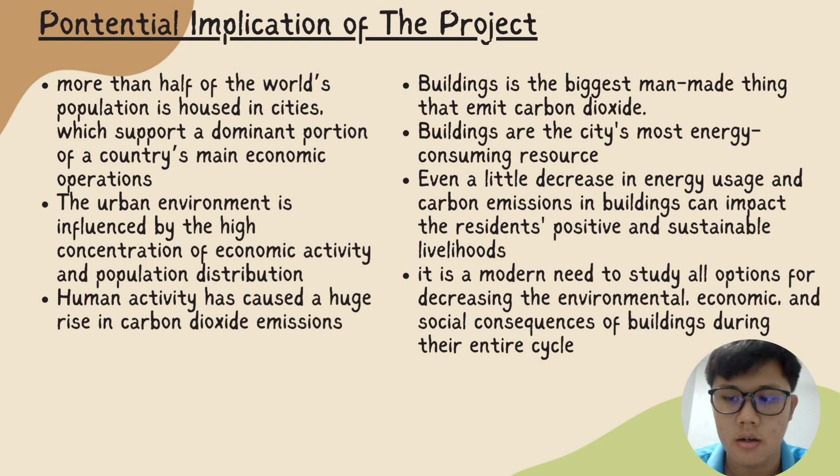So to solve the issue that I mentioned before, the high rising carbon dioxide emission, one such idea is green building, also known as energy saving building, ecological building, or sustainable building. Green building has a greater commercial value than standard buildings because of their perceived lower carbon emissions, energy savings, and optimum economic advantage throughout the life cycle.

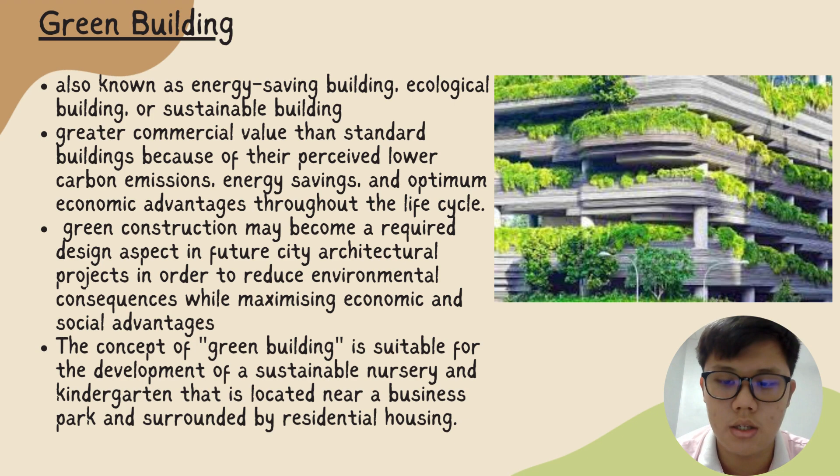Because of this, green construction might become a required design aspect in future city architectural projects in order to reduce environmental consequences while maximizing economic and social advantage. So, the concept of green building is suitable for the development of a sustainable nursery and kindergarten that is located near a business park and surrounded by residential housing.

Next, let me explain the potential implication of sustainable construction towards the environment. First, sustainable construction can save water. There are several ways for sustainable construction to save water, such as water-efficient sanitary items such as toilets, bidets, urinals, sinks, and many more, water waste prevention, and water collection and storage systems.

Besides that, sustainable construction can minimize the use of non-renewable resources and lower the ecosystem impact. Erosion and sediment control, stormwater management, and sustainable landscaping can create a sediment and erosion control plan that can reduce soil loss during the sustainable construction. Furthermore, the use of renewable materials in the construction of the sustainable nursery and kindergarten, such as bamboo, cork, and wheat straw boards, or even certified wood, can help to reduce the use of non-renewable material.

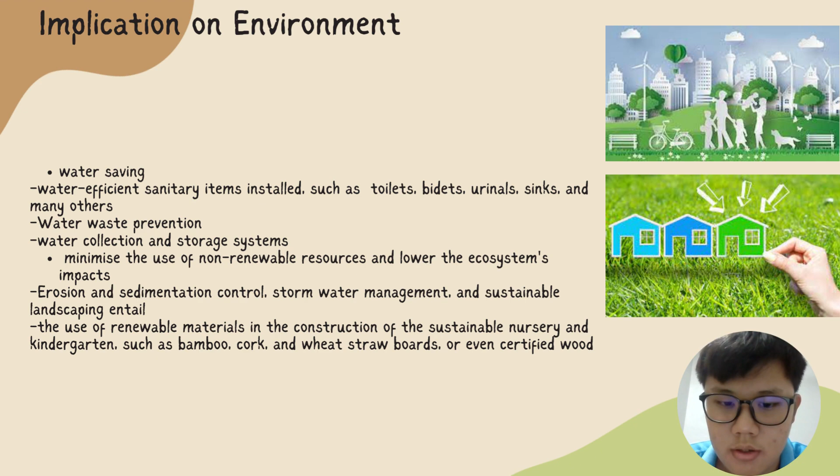Next, the potential implication of sustainable construction towards the environment is that it can lower air pollution and greenhouse gas emissions. Emissions are decreased by energy-efficient design, the use of renewable energy, and the building commissioning of the sustainable construction. Next, it also can save energy. Passive building design, high-efficiency HVAC systems, and even electronic devices with Energy Star labels can help to save energy.

So lastly, sustainable construction can lower the building life cycle emission. The nursery and the kindergarten might be employed to encourage the long-term growth of low-carbon construction.

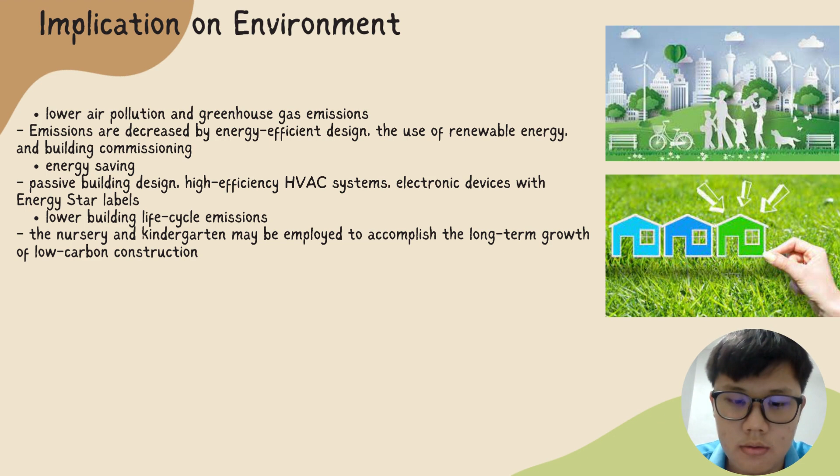So let's move on to the implication towards the economy. First of all, the green building concept that is applied to the nursery and kindergarten can bring secondary financial opportunity to both the building owner and society, in addition to leading to cost reduction. For example, green building elements can improve the health, convenience, well-being, and productivity of building occupants, and this can lower absenteeism and increase productivity to provide owners financial gains.

Second is the initial cost can be offset. This can be done by enhancing the building envelope by removing the perimeter heating, ventilation, and air conditioning HVAC system and minimizing the HVAC system, and this can lead to lower energy usage and lower maintenance and operating expense.

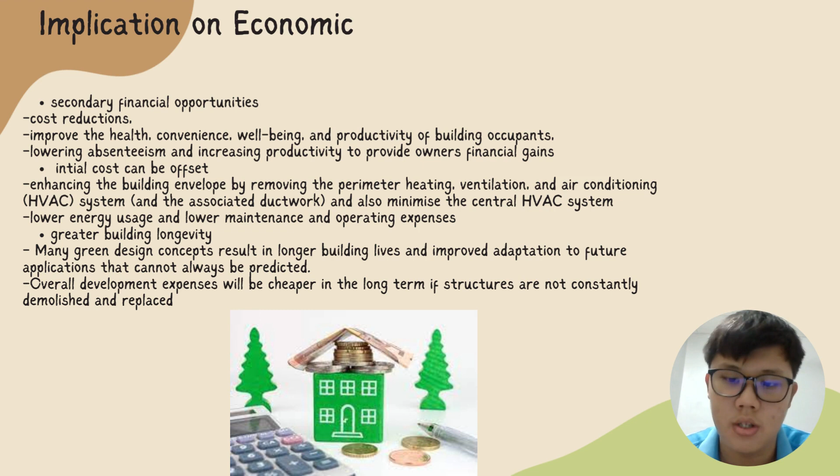Lastly is the greater building longevity. So many green design concepts result in longer building lives and improve the adaptation to future applications that cannot always be predicted. So overall development expense will be cheaper in the long term if structures are not constantly demolished and replaced.

Besides that, sustainable construction of nurseries and kindergartens can improve worker retention and recruitment. According to Willard, firms that make sustainability a core goal might profit by attracting and retaining young individuals such as teachers and nannies who love the environment and are thus more likely to work harder to guarantee that the organization's environmental ideas are met.

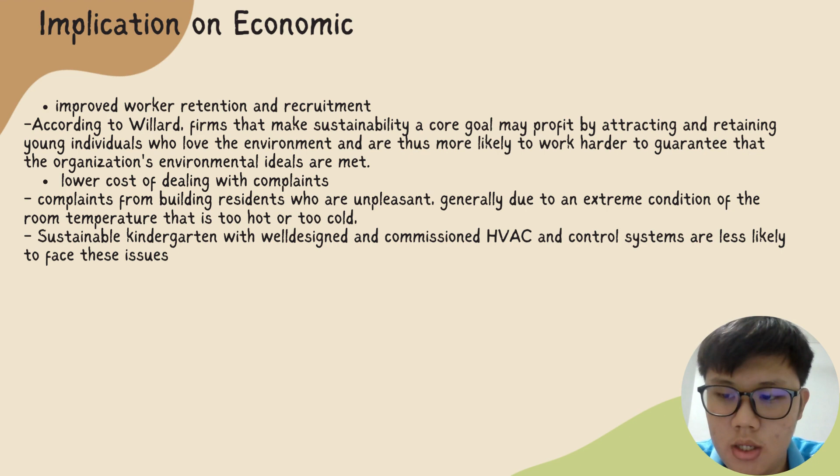So lastly, it can lower the cost of dealing with complaints. Complaints usually come from building residents who are unpleasant, generally due to an extreme condition of the room temperature that is too hot or too cold. So the sustainable kindergarten with well-designed and commissioned HVAC and control systems is less likely to face these issues.

Last but not least is the implication towards social. Firstly, sustainable construction can ensure good air quality and thermal comfort. It is important for the health and growth of children as they need good indoor air quality for their growth and well-being. Second, it can provide the correct finishing materials. So the materials applied in sustainable construction can provide a nice texture in order to maintain the kindergarten building's pleasant temperature despite the absence of any mechanical cooler.

Third is it can promote light comfort. Adequate light comfort is critical for achieving a more comfortable environment and a positive visual comfort impact in kindergarten. So lastly is the acoustic comfort. The kindergarten and nursery can provide a calm environment in which children can concentrate on their academics and social development by removing the distraction of noise that generally comes from the HVAC system and plumbing systems.

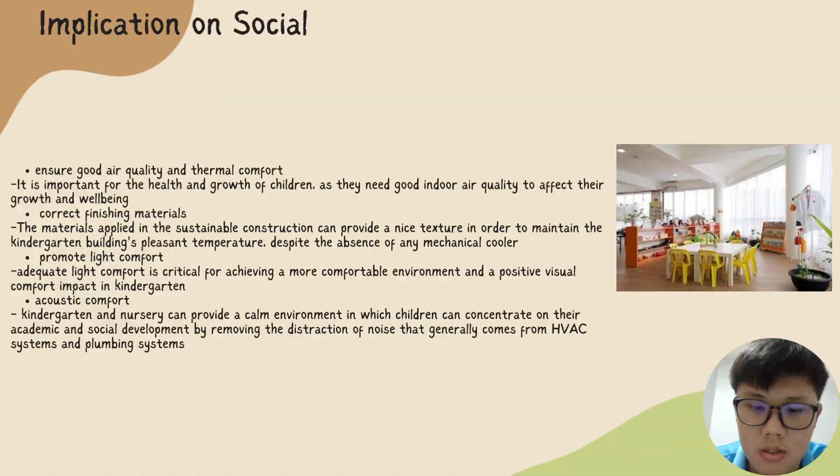I will continue the part which is the practical sustainable strategies throughout the project life cycle in developing a nursery or kindergarten in hilly areas. So here I will provide three practical sustainable strategies, which are: first, implementation of energy efficiency techniques; second, site planning and management; and third, selection of materials and resources.

In implementation of energy efficiency techniques, first, use energy efficient lighting both indoors and outdoors of the nursery and kindergarten. Fluorescent bulbs consume at least 75% less energy and frequently last 20 times longer than incandescent lights. The bulbs do not require as frequent replacement. LED light bulbs and fixtures are a better alternative since they use less energy and have a lifespan that may be up to 5 times longer than fluorescent lights. LEDs run substantially cooler, which helps lower the cooling burden on the building.

In addition, utilize more efficient cooling or heating equipment in the nursery and kindergarten. If a building is newly developed, it is better to introduce the use of a heating, ventilation, and air conditioning system. Similarly, replace conventional tank-based water heaters with tankless water heaters. Around 30 to 50% less energy than conventional water heaters is used by these more energy efficient models.

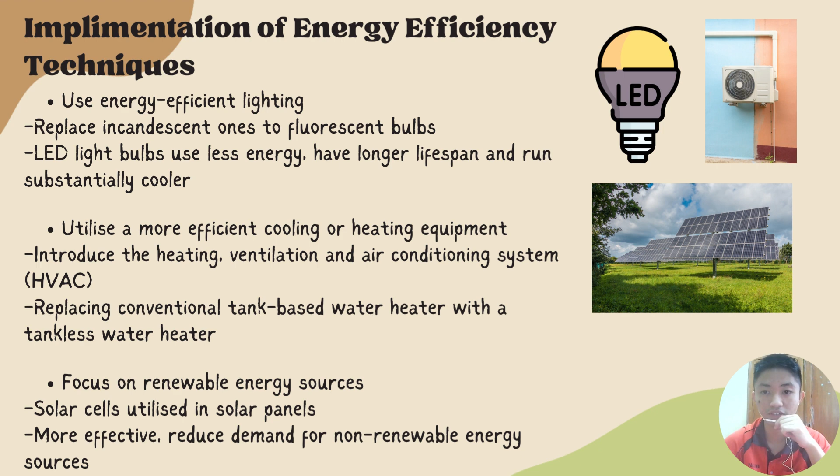Lastly, focus on renewable energy sources in developing a nursery and kindergarten. Solar cells transform solar energy into a source of renewable energy that may be used. Buildings can be more effective since utilizing the sun reduces the demand for non-renewable energy sources.

Site planning and management. A building's right orientation alone can save up to 25% on energy costs. There are 4 strategies that should be applied in managing the site or building layout, which are: elongate the plan on the east-west axis, maximize north and south exposure for daylighting, minimize east and west facing windows, and orient the most populated areas in the kindergarten or nursery to the north and south.

A site's increased imperviousness can have a significant impact on the water cycle. The amount of impervious space on the site should be kept to a minimum. A few strategies for lowering site imperviousness are: maximize the areas with green spaces by increasing the variety of planting, improve lighting and security, and increase the quality and quantity of activities offered in green spaces.

Landscape design is frequently neglected during the early planning phases and added after the project is complete. 1. Use only native species that require drinkable water. Designate landscaping areas to receive runoff and collect rainwater. 2. Place and create landscaping features to clean and filter stormwater.

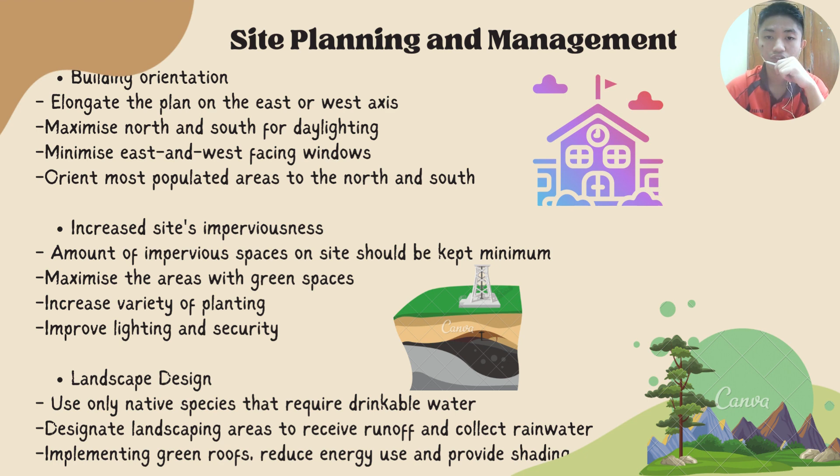3. Large landscapes and buildings can get shade in the summer and sunlight in the winter. Implementing green roofs that reduce building energy use by cooling roofs and providing sun shading.

In selecting materials and resources, one of the materials that's strongly recommended in developing a sustainable nursery and kindergarten in hilly areas is timber. Timber is the material with the lowest environmental effect throughout both its production and life cycle.

Next, insulation from renewable resources that are fully recyclable and biodegradable, such as cellulose that may be made from waste papers or newspapers. Those do not produce waste and regulate temperature with the maximum level of effectiveness. Besides, use paints and wood treatments which are considered natural.

Lean manufacturing is one of the useful strategies that can be implemented in developing a nursery and kindergarten in hilly areas in order to reduce energy. It involves identifying and stopping the wasteful activities that the developer engages in. Some materials may be recycled on the spot, most notably concrete, which can be broken and utilized as aggregate.

By using materials made from recycled resources, projects pursuing LEED can earn numerous points. For putting in water-saving dual flush toilets, low-flow faucets, and other amenities, LEED points are also available.

Lean construction techniques, enhanced on-site maintenance, off-site fabrication, landfill avoidance, and the use of green materials have all started to fundamentally, if slowly, change how buildings are built today.

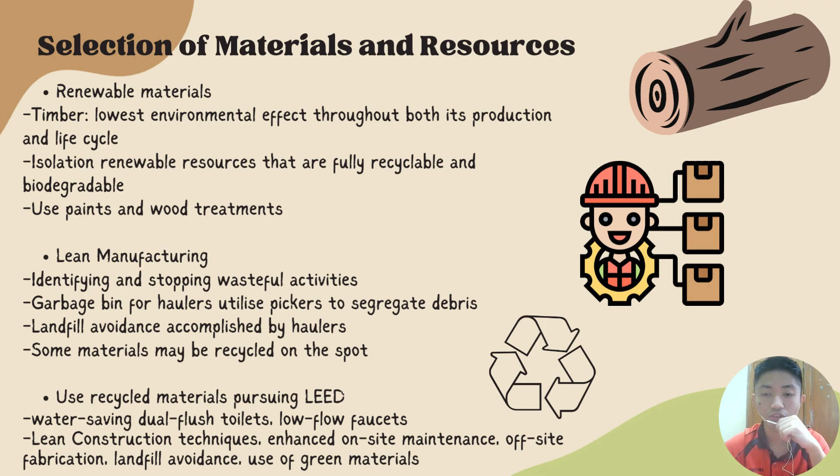So in this section, we will find some case studies that prove that the green building kindergarten can be built in the real world with sustainable strategies. So the first one is Rain Tree Kindergarten, Bangkok, Thailand. This kindergarten is surrounded by rain trees like banyan, tamarind, and cassia, which can cool down the air on the site, so the use of air conditioning in the kindergarten is decreased.

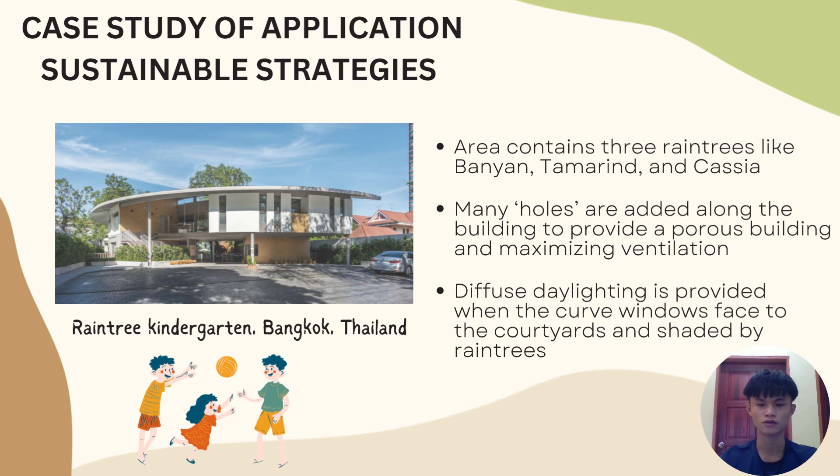On the upper floor, a circle-shaped hole is used to visually link the two floors, and many holes are added around the building to provide a porous building and maximize the ventilation. Last, diffuse daylighting is provided as the curved windows face the courtyard and are shielded by rain trees, so it decreases the use of electric lighting, and the class can spend the whole day in daylight.

The second case study is Pou Chen Kindergarten, Dong Nai, Vietnam. This kindergarten used the concept of a farming kindergarten, meaning the building provides a continuous green roof, fruit and agriculture experience to Vietnamese children. And the windows on two sides of the building continuously provide maximum cross ventilation and natural light.

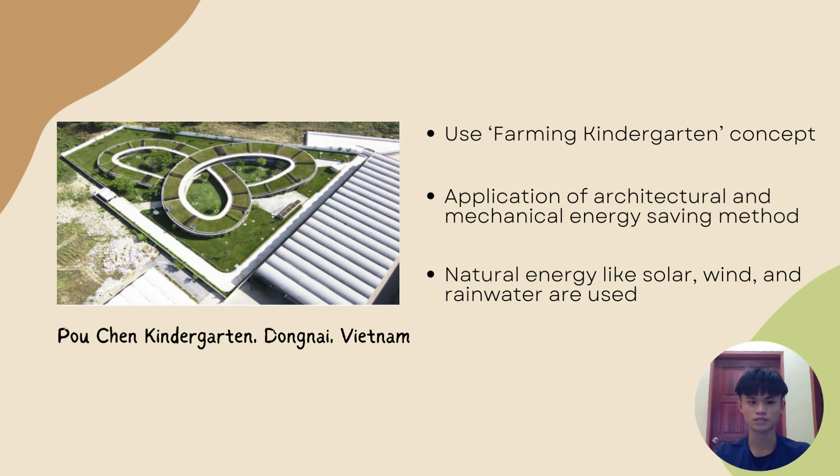And the application of architectural and mechanical energy saving methods helps the kindergarten to save 10% energy and 40% water. Last, natural energy like solar, wind, and rainwater is also used to minimize the use of electricity and mechanical equipment.

Next is Hadera Alfa Kindergarten in Israel. This kindergarten can be considered a net zero energy building because the energy used during operation does not exceed the energy it can generate during operation. So solar energy is harvested through the rooftop solar PV panels to supply electrical power to the kindergarten.

And the high efficiency LED lighting fixtures help in lowering the installed lighting power density overall. Last, the high efficiency inverter HVAC system provides and secures fresh air into the kindergarten.

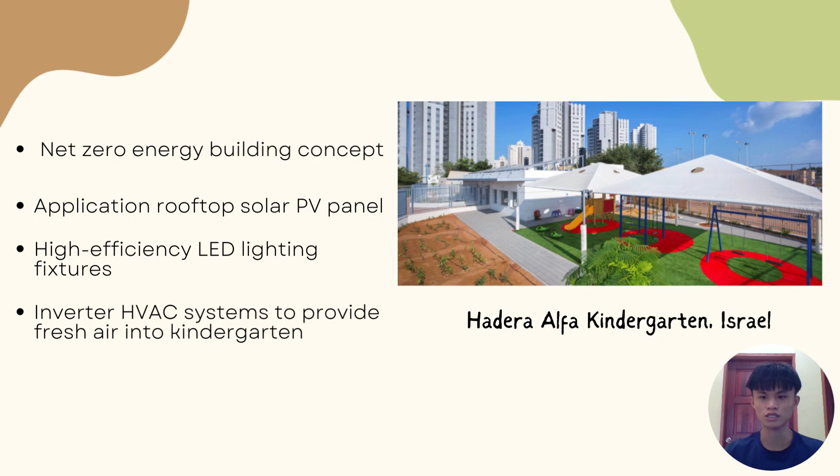Last is Rocking Horse Nursery, Scotland, United Kingdom. This kindergarten is a passive house, meaning that it can maintain a comfortable interior temperature without the use of heating or cooling systems. The requirement for the passive house is that the building envelope is covered by super insulation to reduce thermal bridging. This design can help owners to save money and provide benefits to the users.

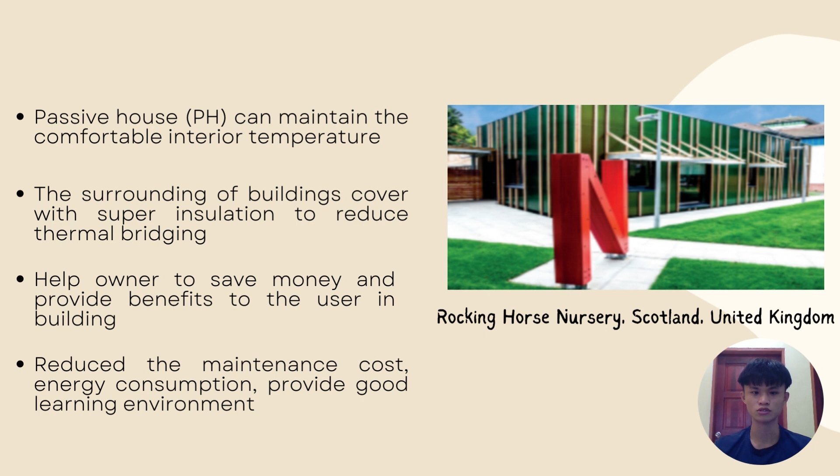For example, it reduces the maintenance cost, reduces energy consumption, also provides a good learning environment for children, and the green structure can become a selling point to parents.

Second, it will create a healthier and more comfortable environment for children and staff. Third, it will provide convenient access for working parents and serve as an example of sustainable building practice. Overall, a sustainable nursery and kindergarten can be a valuable asset for the community and a model for future sustainable development.